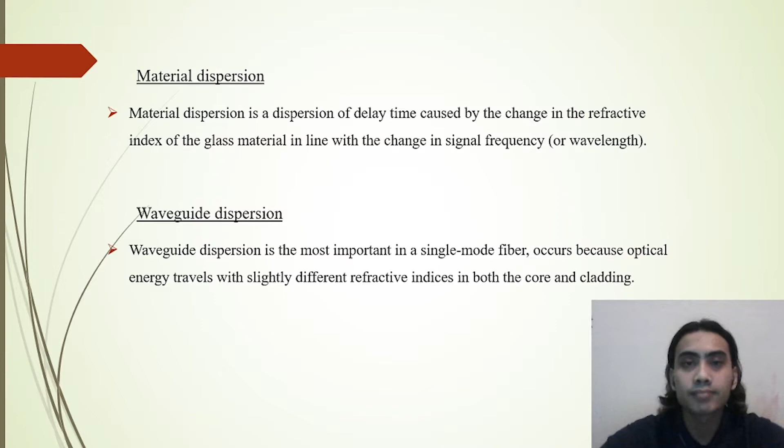In this part, it outlines the research carried out on the working process of the project, basically its methodology in designing the simulation circuit that portrays the dispersion in an optical transmission system, generally in an optical fiber. The proposed project will be two circuits with different parameters that portray two different dispersions occurring in an optical transmission system. The use of two simulation circuits is to observe and analyze the comparisons of the outputs between two different types of dispersion. This project will be solely done and simulated using a simulation software called OptiSystem.

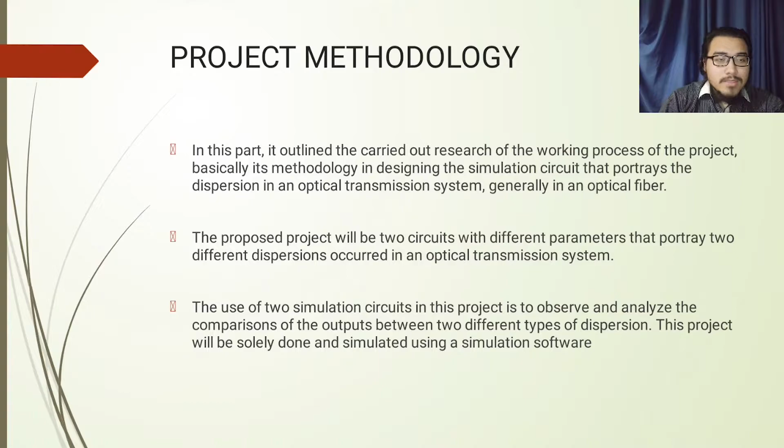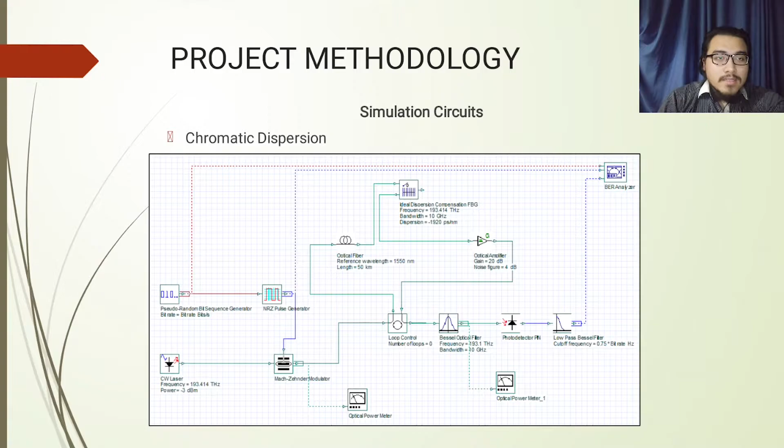So basically, this is the construction design of the chromatic dispersion, and this is the construction design for the modal dispersion.

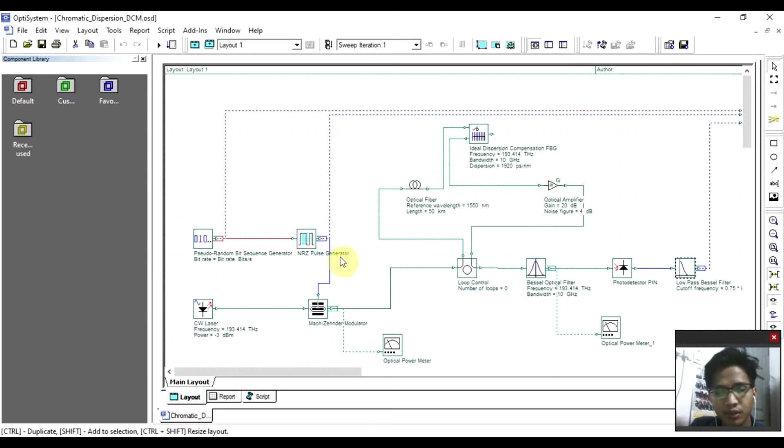I would like to explain about the simulation circuits of chromatic dispersion and modal dispersion. Two types of optical transmission dispersions were simulated to compare the performance of both optical transmission systems, and this was the chromatic dispersion of the optical transmission system. Now run the calculation until finish. Then click the optical power meter to show the power at the transmitter and at the receiver.

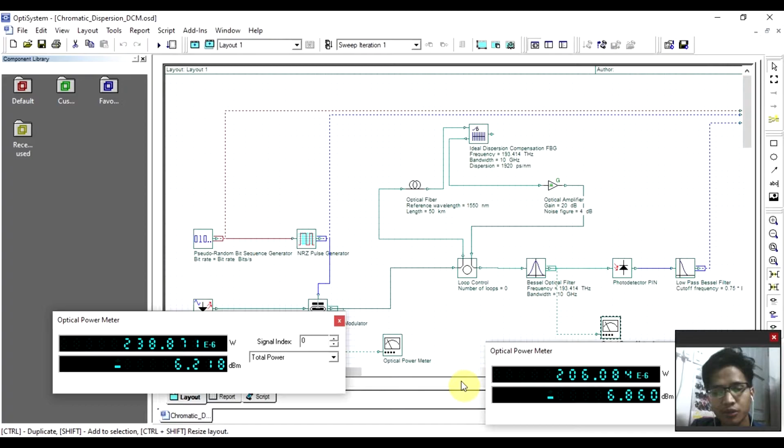The power at the transmitter was negative 6.218 dBm, while the power at the receiver was negative 6.860 dBm. Power in dBm was converted from the watt value by the formula of 10 times log base 10 of the power. After that, click the BER analyzer to obtain the BER analysis. As you can see, the eye diagram was sharp and not degraded.

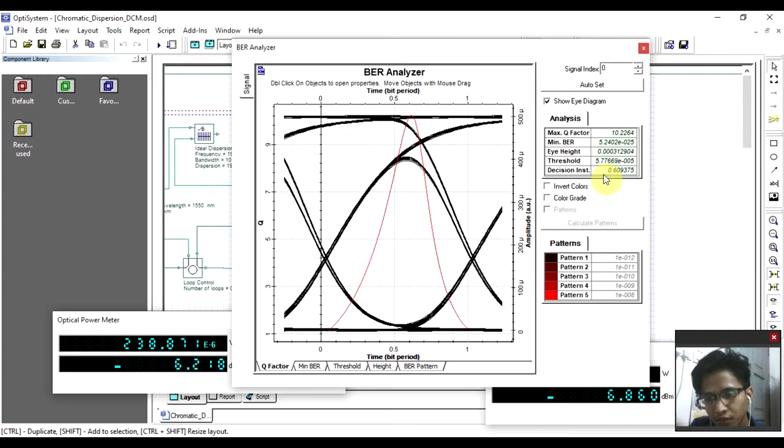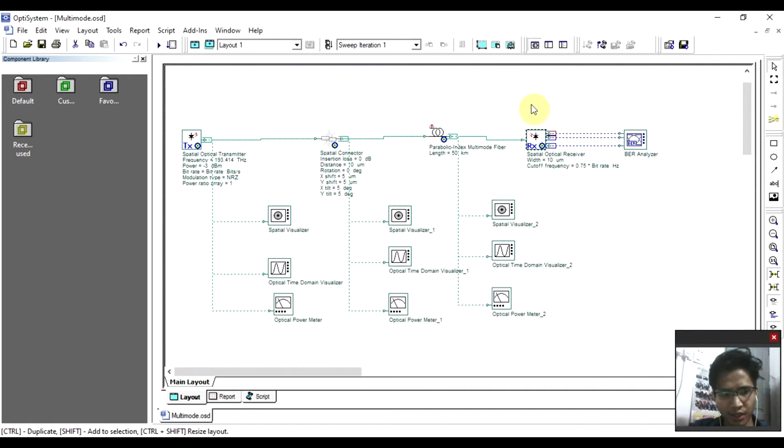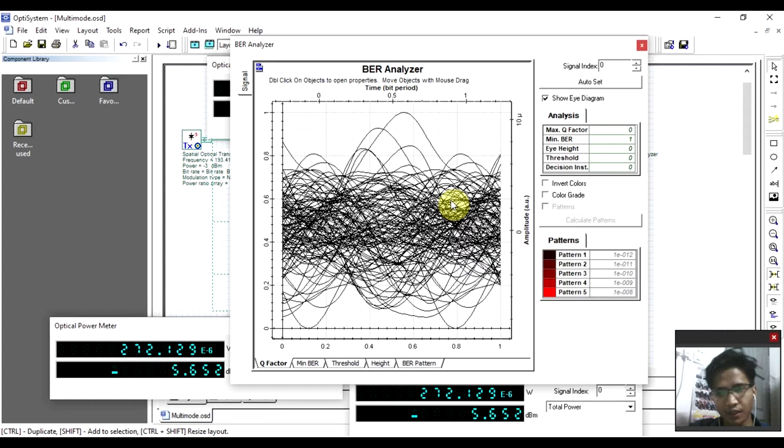transmission system. We can see that the optical power meter at the transmitter and at the connector were the same, which was negative 5.652 dBm. But at the end of the parabolic index multi-mode fiber it was different, which was negative 100 dBm. Next, the BER analyzer showed the eye diagram, or the BER analysis, and showed a degradation of the eye diagram and only had a minimum BER of 1.

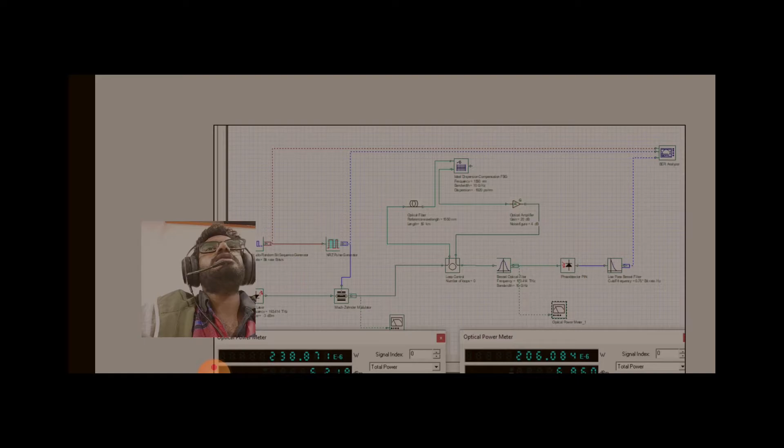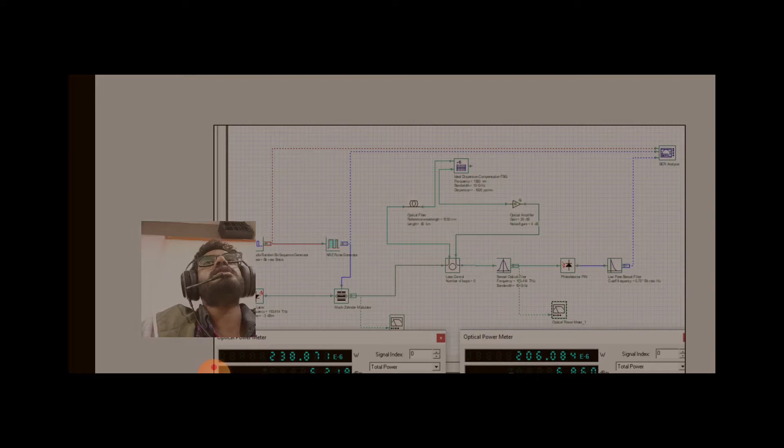To design the first optical fiber topology, a wavelength of 1550 nanometers, dispersion of 1920, power of negative 3 dBm, bit rate 10 Gb, gain 20 dB and length 50 km is used. For this circuit, two optical power meters are placed on the Mach Zehnder modulator and optical filter to measure the total power. For this circuit, total power around 238.87 microwatt and around negative 6.3181 dBm, and 206.08 microwatt and negative

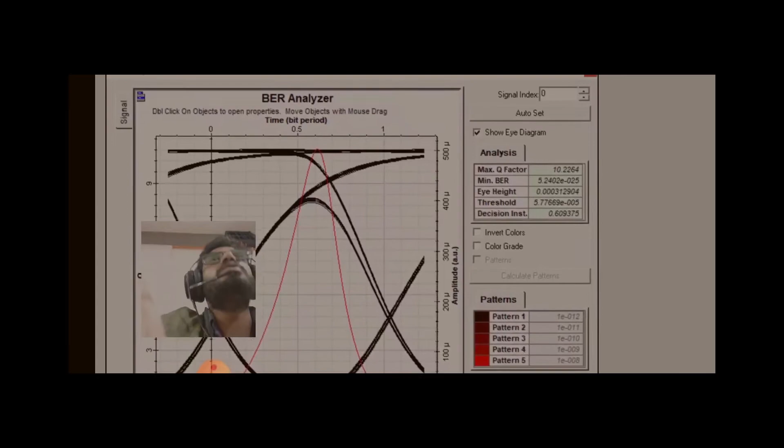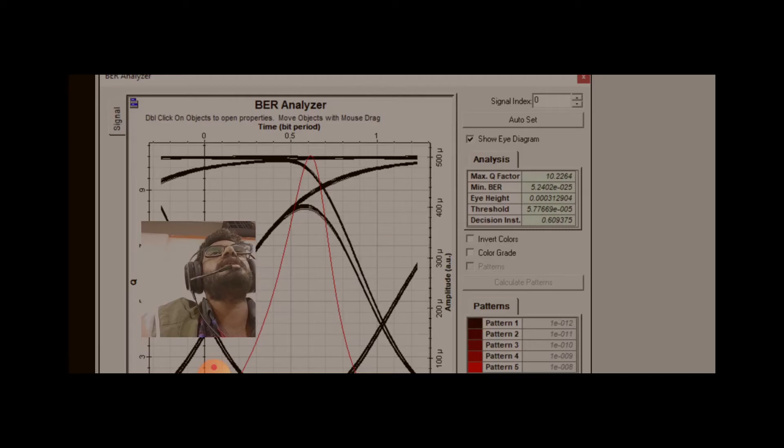For this circuit, 3 optical power meters are used. The optical power meters are placed on the optical transmitter, connector and parabolic index multimode fiber. The optical power meters record readings of 272.129 watt, 272.129 watt and 24.263 watt. For BER analysis, max Q factor, eye height, threshold and decision instant readings show 0 while minimum BER shows 1.